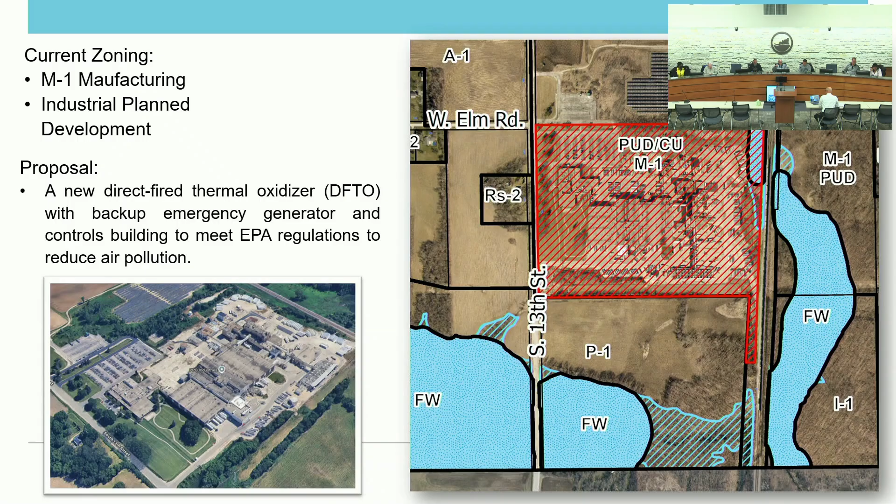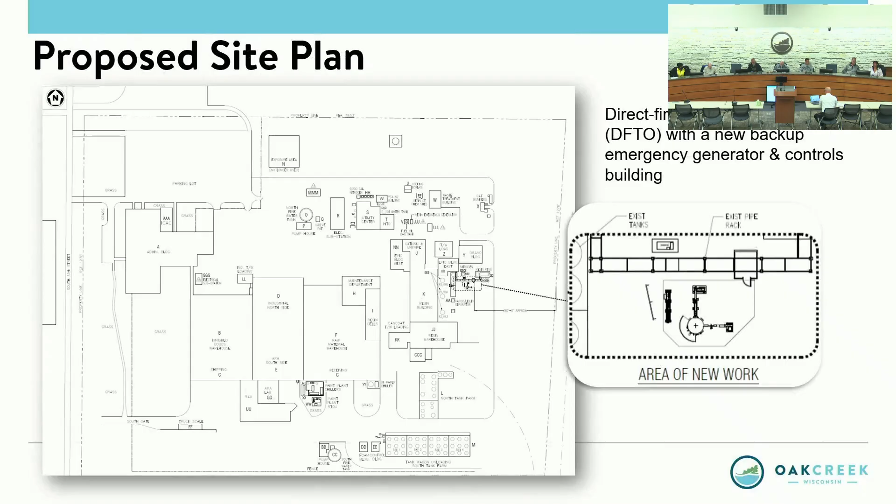They're looking at adding the generator, which is approximately 50 square feet, a proposed vapor combustor with access platforms, which will be the tallest at 35 feet in height, again gray in color. They will also be adding a controls building that will be about 100 square feet, 11 feet tall, gray in color. The exterior material is gauge steel. The vapor combustor and associated structures will be placed on a new concrete slab that's about 800 square feet.

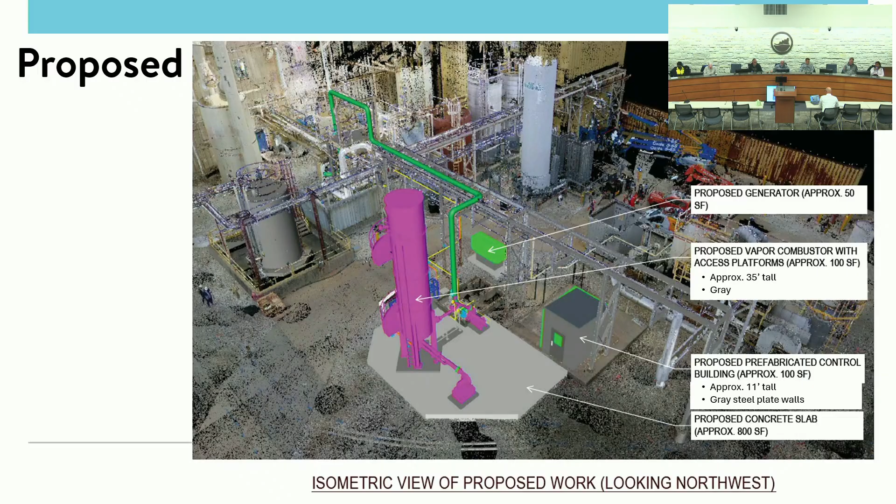They will be adding some lighting to the site with this. As I mentioned, there's a couple of platforms on the vapor combustor - those will have two platforms, and each will have two light fixtures, pole mounted, each being 7 feet tall, all directed downward, at 4,000 Kelvin for color temperature. There will also be a wall-mounted fixture roughly above the door of that proposed controls building, again downward facing and 4,000 Kelvin for color temperature.

Because of the location and the fact that it's already surrounded by paved concrete areas, there's no requirement for landscaping for it.

So the applicant is here if you have any questions about it. Otherwise, I have a suggested motion on the screen for you.

Great, thank you Todd. Does the applicant want to wait on questions or make a statement? Okay, she indicated she'll wait on questions. Christine?

Just for Todd, I'm guessing since it is within the main site, there's not going to be any additional controlled access, so they have the main access for safety, right? Yeah, it's at the far east of it. Getting back there, my understanding is it's all behind gates to get to it. The public main entry isn't really an option there. No, there were no other concerns - the fire department had no concerns, and engineering had no concerns. That's it, thank you. No questions from Steve.

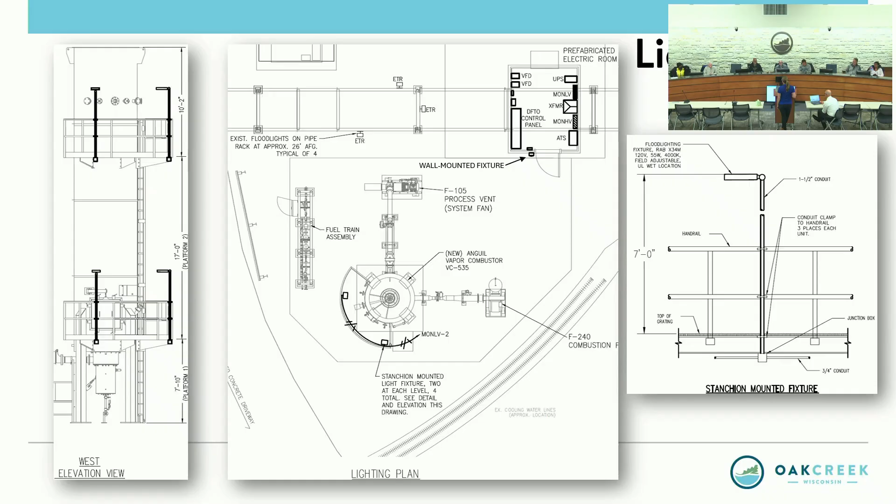And the other thing - does it cover the complete plant with this system? It covers approximately half of the plant. Certain parts of our production areas are covered by what's called the MON regulations due to some of the chemicals they handle. This is part of the EPA regulations that are changing, directly related to MON, so it's only affecting that part of the plant - like our resin plant, our tank farm, and waste treatment center. Thank you.

Chelsea, no questions. Thank you. Okay, I myself have no questions either. I've been on the site numerous times. It's a very well maintained, taken care of plant.

And our fire department - I think in the reading, the most key part here, at least from the city's perspective, is that our fire department is in lockstep with them.

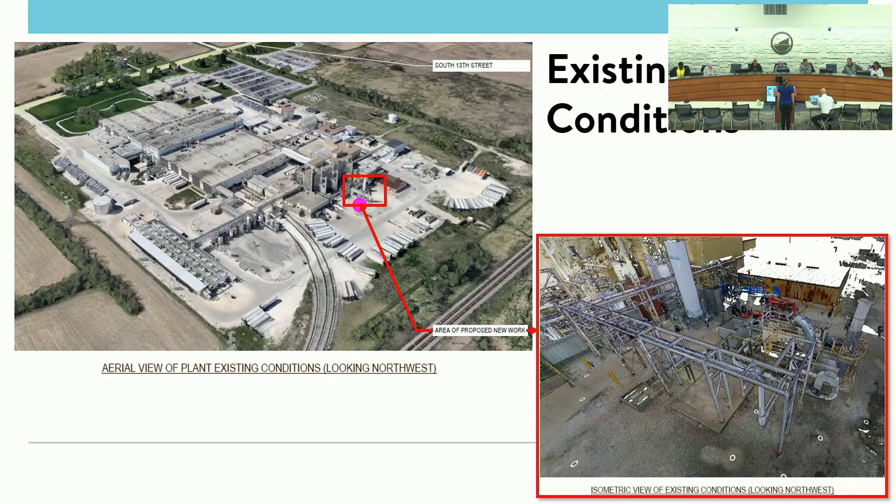There's no further discussion. Motion on item 4: Clerk moves to approve site and architectural plans for construction of a new direct-fired thermal oxidizer with a new backup emergency generator and controls building at PPG Industries, Inc., an existing business located at 10800 South 13th Street, with the following conditions: 1, that all relevant code requirements remain in effect, and 2, that this approval by Plan Commission shall expire within 12 months after the date of approval if a building permit has not been issued.

Guzikowski will second. Roll call, beginning with Steve. Balch, aye. Lorick, aye. Kevich, aye. Guzikowski, aye. Seifert, aye. Chandler, aye. Hannah, aye.

Thank you very much. Item 5, going to review a site and related plans for a dog park at Riverwood Estates Apartment. This is an existing multifamily residential complex located at 535 West Riverwood Drive.

Todd? Thank you, Mr. Mayor. So you guys remember this site from a couple months ago - they were here seeking approval for an Amazon hub. Now they're back seeking approval for a dog park that would be located right next to the clubhouse pool, where they have their leasing management office as well. So they're back looking for that approval.

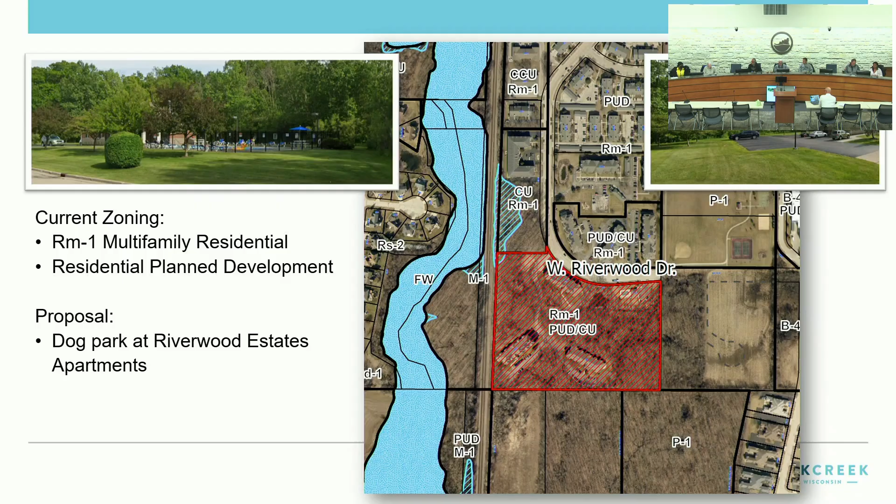It is multifamily residential and a residential planned development overlay. If you recall, that clubhouse area is in the furthest east of the apartment complex, just south of West Riverwood Drive.

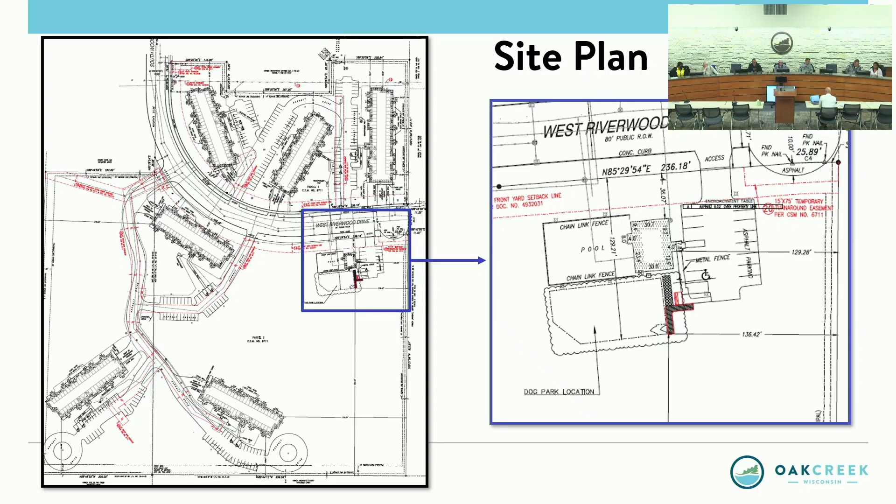They're looking to put that dog park area to the south of the pool and the south of the clubhouse, so it would be very difficult to see from the road, given the pool and clubhouse being there.

They are going to be clearing a little bit of brush and trees on site. They provided inventory on the trees, and none of them required replacement by our tree preservation code. The overall area of the dog park will be just under 4,000 square feet.

It's going to be surfaced with an artificial turf, enclosed within a 4-foot tall black wire steel fence with aluminum trim, and a 6-foot wide gate facing east toward the parking lot area.

This entire area is not encroaching on the wetlands to the south, leaving that 5-foot undisturbed buffer area intact, so it won't be disturbed. There's also a paver walkway being added to get from the parking area to the dog park itself.

They will be adding additional landscaping, some grasses and shrubs, as a border between the dog park area and the pool area, wrapping around to the front with a nice shade tree. You can also see the existing Amazon hub, which is where they previously got approval to place that.

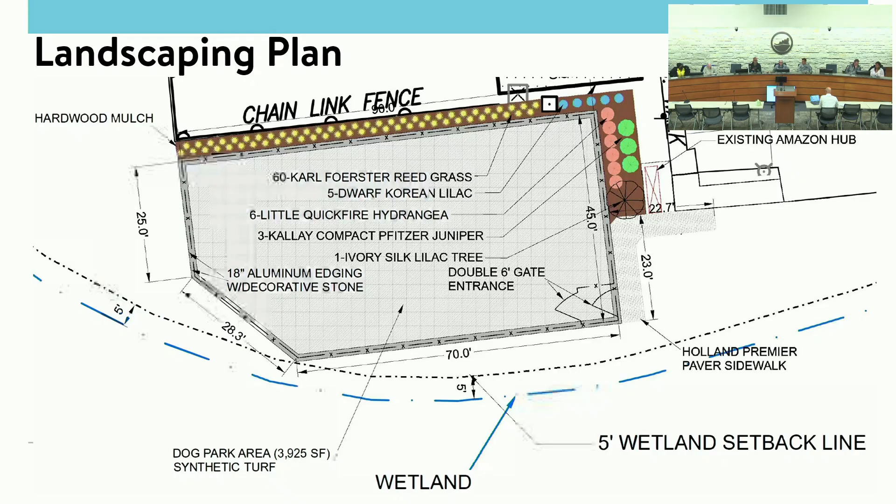The applicant is here for this as well if you have any questions. Otherwise, the suggested motion is on the screen for you.

Thank you, Todd. Applicants, once again, do you want to say anything or wait on questions? Okay, they indicated they'll wait.

Let's start with Christine. Just one question, maybe for Todd or the applicant: will residents have an access code or key to get into the dog park, to make sure only residents can access it and it's not open to the public? Well, for an accurate answer, I'd have to defer to the applicant on exactly how they're doing that.

Need your name and address, sir. Peter Wisniewski, 535 West Riverwood Drive. There is no lock at this time. We believe it's secluded enough that only residents are aware of it, and it's not an area easily accessible to the public. If it becomes a problem, we do have a fob system on the pool, required by code for public safety, and we can add that and expand it. At this time we don't anticipate it being a problem, but if it is, we'll put a fob system on it.

Okay, thank you. Oh, my question just got answered, I have no concerns. Chris? This is in my district, I haven't gotten any calls, questions, or concerns about it. I'm fine with this plan so far. Brad, questions? Rossi, no questions, thank you. I don't either, I think it's a nice amenity for folks that are there. It's a great secure area for people to enjoy their pets, so I like to see it. Well, if there's no further discussion.

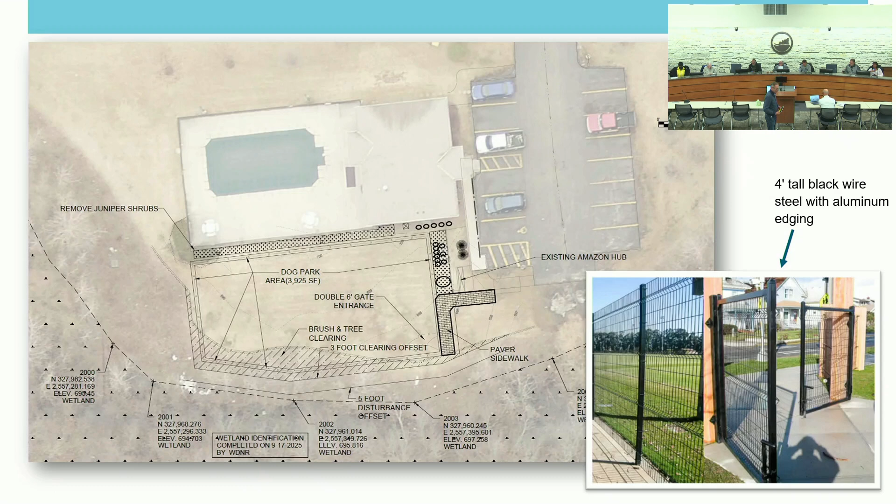We'll look for a motion on item 5. Clerk moves to approve site and related plans for a dog park at Riverwood Estates Apartment, an existing multifamily residential complex located at 535 West Riverwood Drive, approved with the following conditions: 1, that all relevant code requirements remain in effect, and 2, that this approval by Plan Commission shall expire within 12 months after the date of approval if a building permit has not been issued.